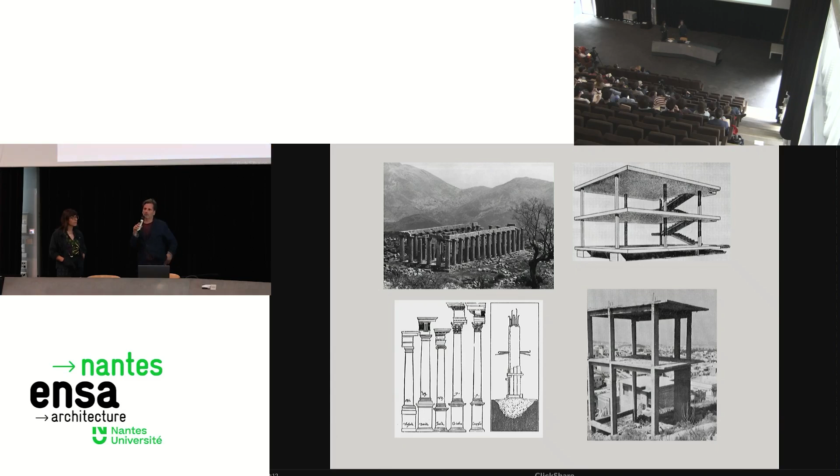In fact, in Greece it's very common to see things like this, objects that are semi-finished systems, like frames, which have been inhabited or programmed only partially, so part of them remain empty, unprogrammed, unfinished. This means Greek people have become very accustomed to certain ideas, for example the unfinished, the unorthodox, the random, the phasing of things. Architecture is not an object, not a specific form, not something that is necessarily finished or has a form.

On the other hand, we think, if we think of Athens, we think that it has peculiar beauty and form, which is largely thanks to other things, not the architecture of it. It's something that we often think this painting of Spiros Vassiliou summarizes very well, because we see here a portrait

of Athens that is made of its most important elements or layers. You see in the foreground an outdoor space with a couch, a veranda or roof terrace. Then you have a layer of six floors of frame, of pilotis, of polykatoikias, dominoes. But then you always have nature in the back, in the form of the mountain, and also a blue sky on top with an omnipresent sun that's always there. So Athens is made of all these things, not just the building typology of the domino, so it gets a particular form and beauty.

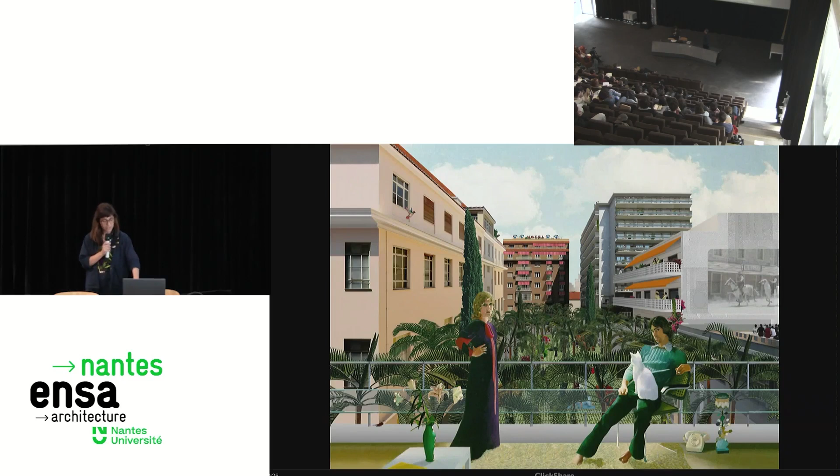Another project that also dealt with Athens as a whole is the theater square. This is an urban void in the center of Athens. What is interesting in this project is that it dealt with many different scales. I think it is one of the first projects that actually married our need to give an icon to the city, but also dealt with the human scale.

As you can see in this diagram, we use nature as architecture, as the icon, so you could see the palm trees from far away. But at the same time, we treated the ground floor with a lot of sensitivity to give a very sensual and intense spatial experience. This is the space as it is now, and this is our proposal. So we created this very dense space, but actually made out of nature alone.

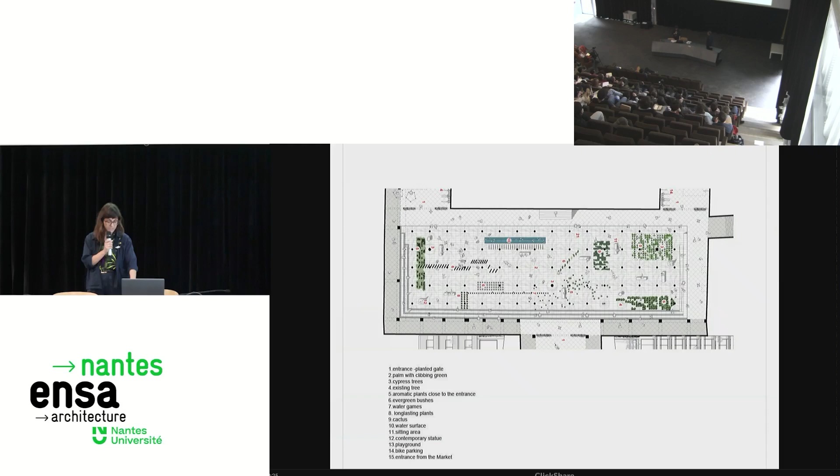The plan that you can see, we treated nature as a building, but again with a lot of detailing where the people were entering, where are the big palm trees that you can see from far away. The sketches that we were doing during the competition - we always start with a sketch and then we ended up with a collage that has more precision.

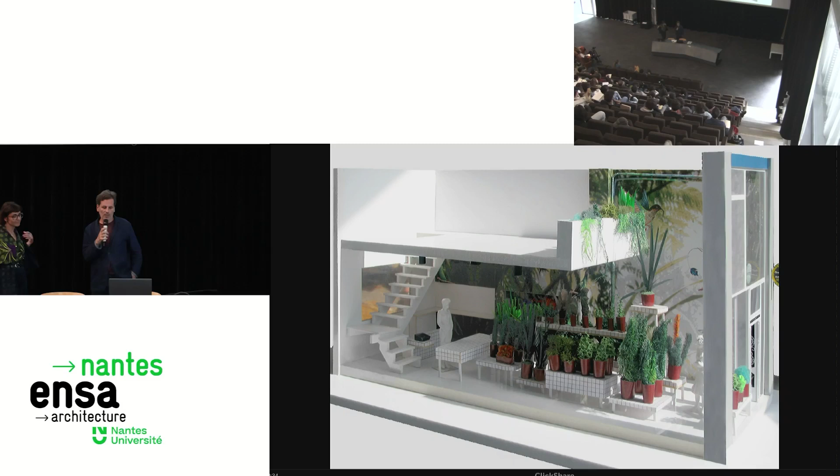What happened is that we treated this commission, this brief, as an urbanism brief. So what we did was create a small city inside the shop, in the center of the shop. We imagined little buildings that the clients, the owners of the flower shop, would be able to rearrange and create different cityscapes, like Manhattan.

It was interesting because it reflected the very ambitious radical projects of Superstudio, for example, the Supersurface. But it also became a mirror project to a lot of the urban projects Marianna was showing, which reflected on the relationship between artifice and nature, or city and nature. Because in this project, what we did was create a city that would hold nature, which is a bit what we were trying to do also in the Athens projects.

Specifically, the buildings we made, the tables, were basically white tables made of these square tiles. So the whole space became something like a ruler, a measuring device, an optic device, thanks to which you could appreciate and understand the beauty and differences between the different flowers and plants in the shop. And it really did work.

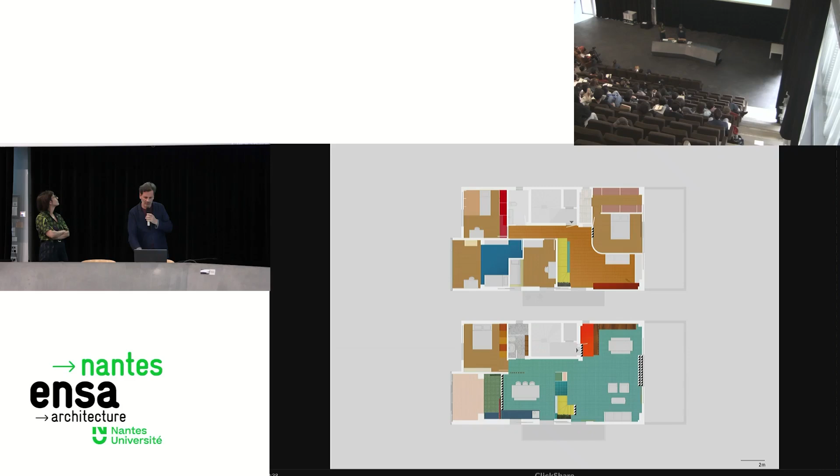What happened in this project is that, influenced by the Athens projects, it was imagined not as a house but as an environment. So the furniture, the first sketch we showed you, and all the programs and functions of the house were imagined as little islands, little universes, little areas, like an archipelago of functions through which the family could move.

So basically the social aspect of the house, as in the city—where the city is about living together—in the same way this house promotes being together. So instead of walls, it has different types of filters, divisions and partitions that are more nuanced, subtle, dynamic and flexible. There were a lot of mobile things so the family could live together and have a feeling of being together, and then when necessary, divide.

These are images from the lower level, which was designed as a kind of subterranean or water-sea situation, like Athens by Islands or Athens by Hills that you saw earlier. This is an image of the entrance, while the upper floor was the opposite—it was kind of an earth situation, more organic in colors and forms.

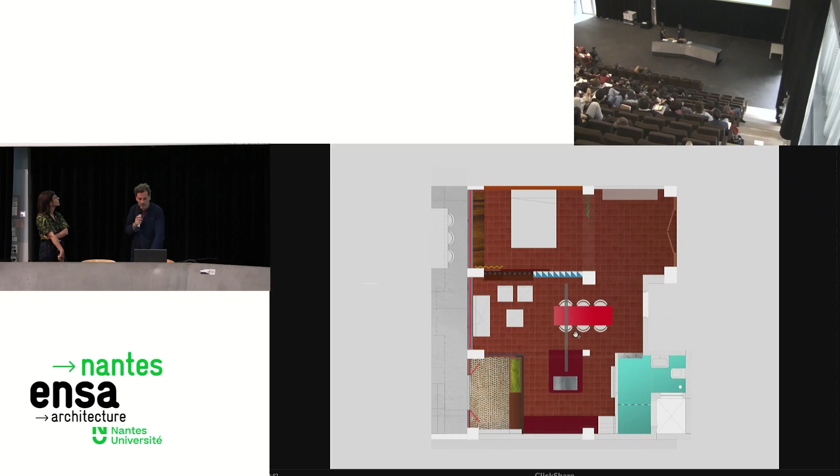And it closes with mobile things, invisible or visible. What was also interesting is that we brought a part of the outside in—we made a little garden-like space at the beginning, which makes you turn. As soon as you arrive, you turn, take off your shoes, leave your coat, jacket and bag, then enter and turn again to reach the kitchen. The result is that the space felt much bigger in experience, because it took more time to circulate.

This is the wall of the bathroom, which was shorter, again, for natural light.

And the second very radical project is this one, is the one that I told you is on top of a polykatoikia, the rooftop. It's called Ignatiou apartment, from last year, so it's more recent.

The difficulty with this one is the size: it was 22 square meters, so basically it's a room. This is the situation we saw when we visited it—4 columns and a roof, abandoned as well, like the basement, so it never materialized.

It's on top of a polykatoikia in the center of Athens, measuring roughly 5 by 4 meters. Three people bought it and wanted to make a house for it—a couple and their good friend, based in Paris. They bought it during COVID, during the quarantines, because they decided they really wanted a space in Athens, in case of more quarantines, where they could go to spend time.

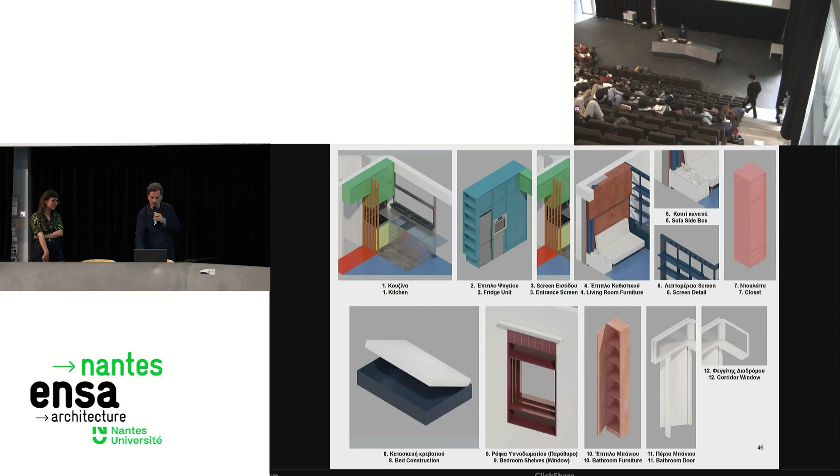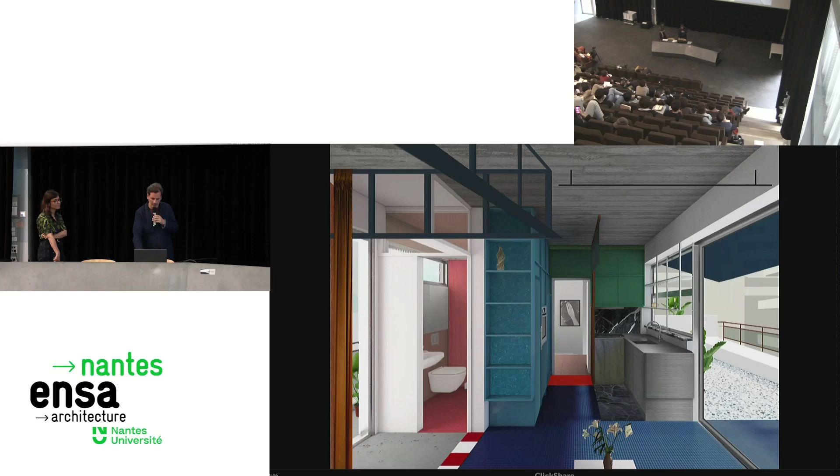Some images—this was the render from the veranda looking back, and the realization. This was a little bit like a piece of furniture, but in the scale of architecture. It's a similar situation to what we saw with the urban projects—the infiltration of urban thinking into architectural work, where there was absolutely no respect for scale in our work. Although it's a very small project, it was designed really precisely as something much bigger. Different views again, looking towards the entrance.

Another trick we did was to build a facade for the veranda. We added columns and a built-in bench all around with storage, a bit typical of the Greek islands, so that visually—especially since the glass has disappeared—you feel the interior stops at the columns. That's not true, but functionally it really does, because the climate is always good, so the door is always open.

So this was the second, maybe very radical project, I think. This is the entrance to this apartment, Ignatiou.

Maybe to finish with these small examples of projects, here's a sketch from a moment when we were trying to trace the different interiors and urban rooms we had designed in the city at the time, because all of them were slightly different pieces in the same family of exceptions of form and program, in a city that's otherwise universally very homogeneous, the same.

So this is the city, this is the city frame, the domino system, and then these are the different things we had designed—like the palm trees square that Marianna showed, 6 dogs, this is the city hall square with the water sprinklers, this was the square pool, a ferry boat we once suggested placing on top of the rooftops, and different apartments that we didn't show today.

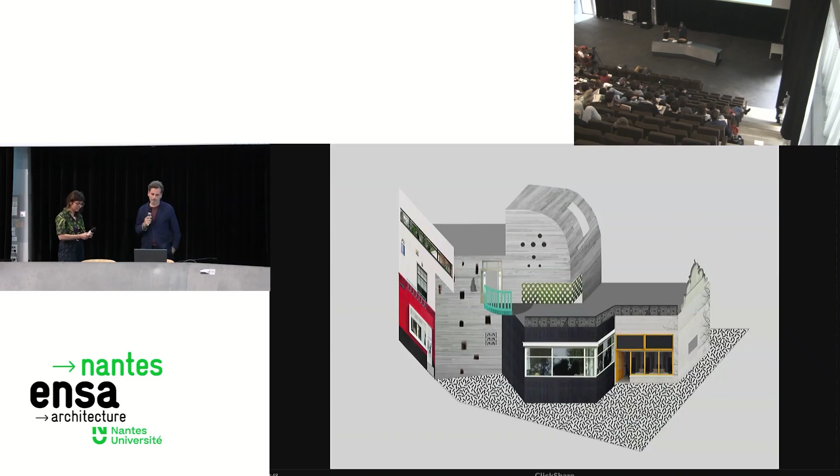I wanted to say that the previous building, this one, Ignatiu, first, because it was the COVID period, first we designed it, and then we visited. So when we entered and opened the door, we said, okay, this is it. I'm trying to show you how big it is, 4 by 5, to understand what this plan means. I don't know if you can tell, maybe it's something like this space, even less.

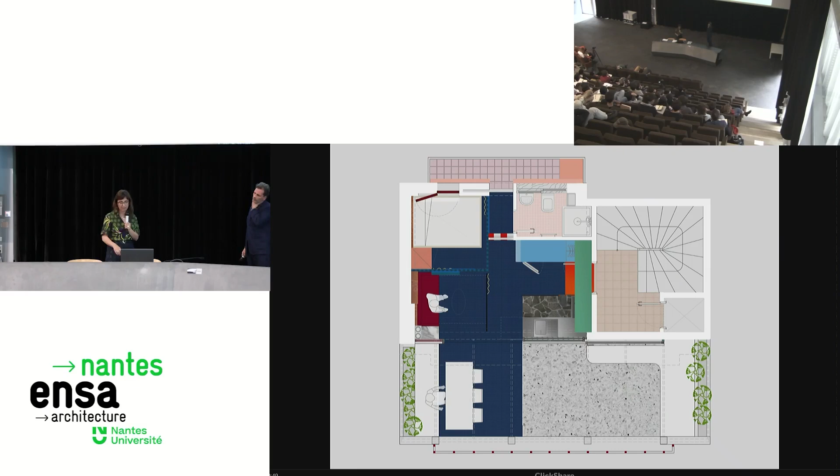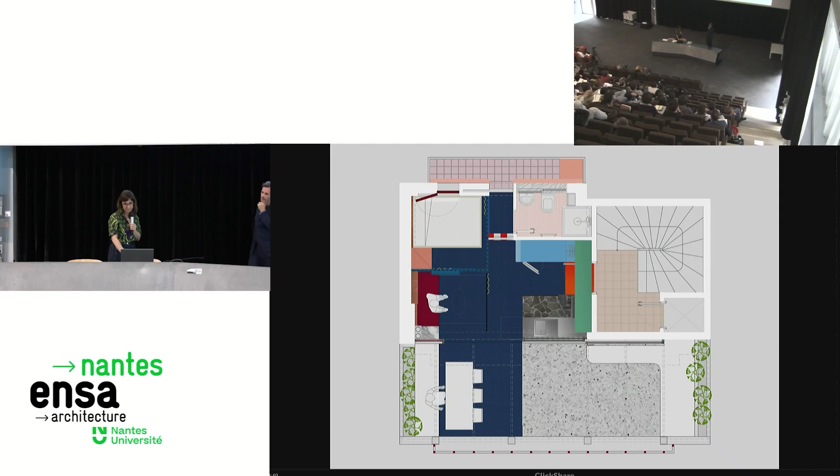It's very interesting, also in this apartment and the previous one, how important for us is the moment of the entrance. We always give a very generous, well-defined entrance, no matter how small the space is. And we always try to put windows and openings toward places where your eye can go as far as possible, giving this connection to the city but also making you feel you're in a bigger space than you are. Where we place the window is a very strategic, important moment in all of our projects.

This project was also nominated for Mies Awards this year. It's 22 square meters, but it was quite radical.

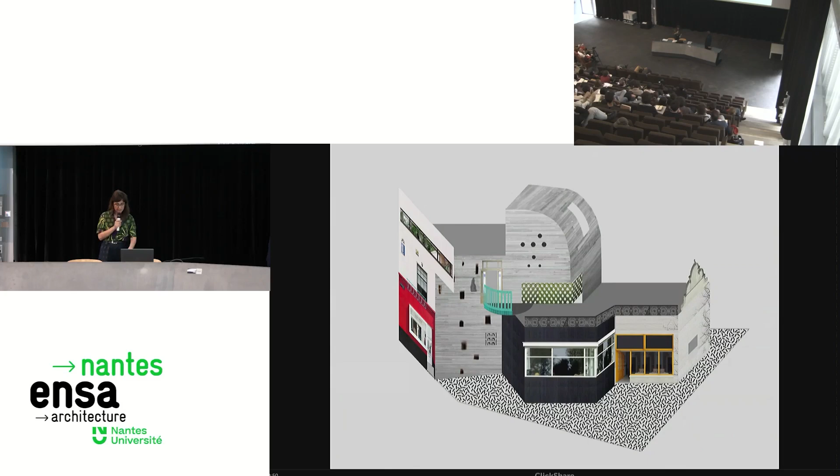And this is the first sketch that we did. Actually, we wanted to treat the house not as a house but as a neighborhood, a collection of different spatial experiences and different rooms, with a center courtyard and center garden, as we call it.

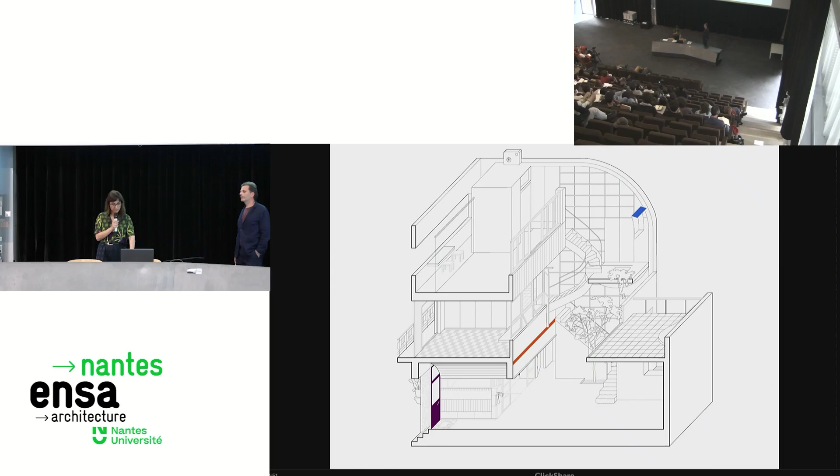And this is the plan of the ground floor. We decided to keep the outline of the existing house, which has this kind of very weird, pixelated shape.

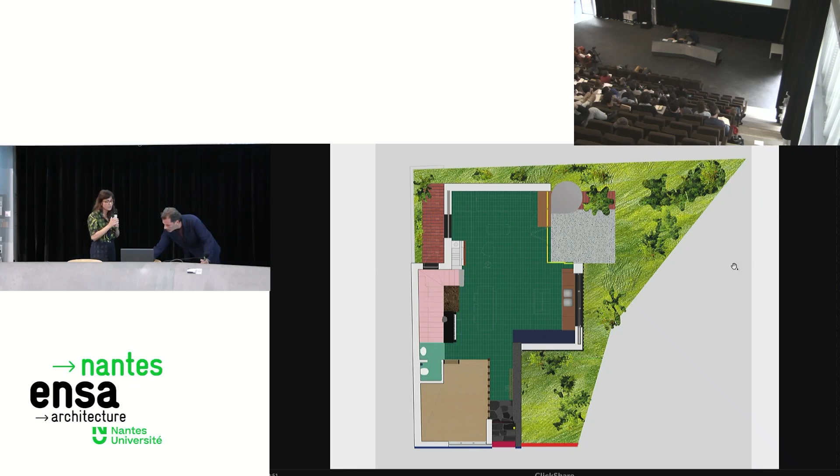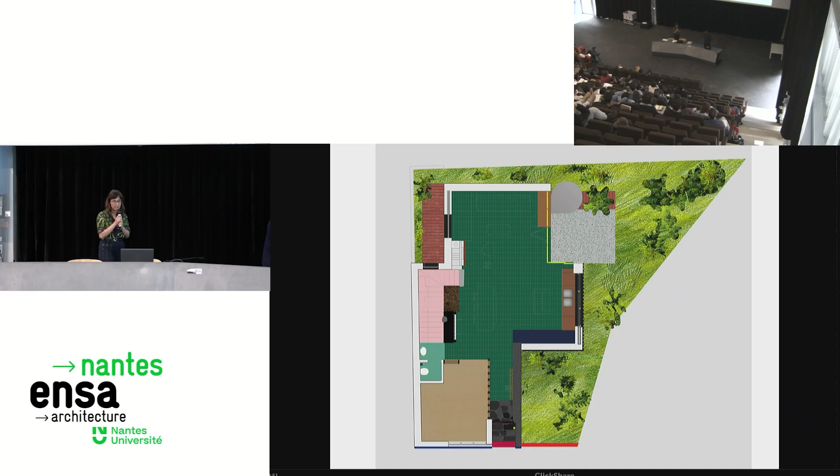For us, this plan was very interesting because it creates very narrow moments but also very open moments, and then you can go around the building. Actually, we designed the ground floor as part of the existing garden, so you cannot understand where the house stops and where the garden starts.

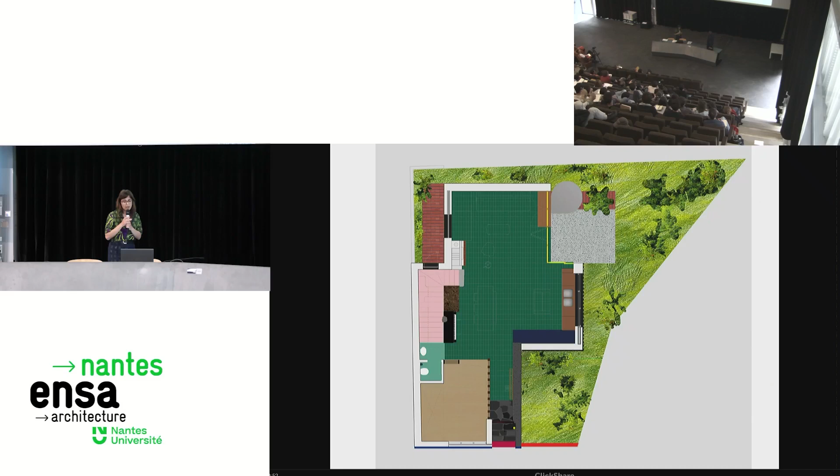As in all of our projects, we treat the materials of the floor with a lot of detail and sensitivity. We think it's the moment you're really in contact with the main material of the house. And this is a sketch of how our son, our kids, and the kids that come often are using the house.

We think this kind of use of the space mostly comes from the richness of materials that this house has. For example, the entrance, where the carpet is, is the wild nature that he tries to cut through. Then it's the stone, which is the earth. Then the green tile is the sea that he dives in. And then this is the wood, the tatami room, as we call it. For him it's the beach, and he takes off his shoes here.

And then we have some movable tables. For him, these are the boats that he goes around on, and so on.

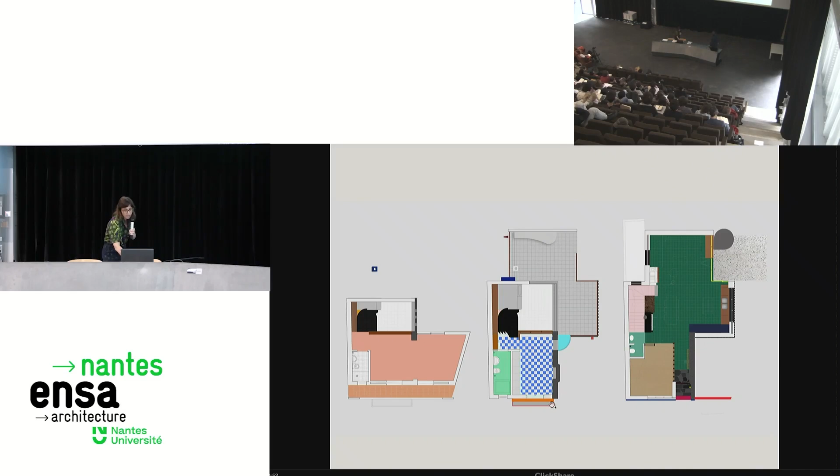These are all the floors of the house. The green one is the ground floor, then the first floor and the second floor. Each floor has its own atmosphere. The ground floor is mainly related to the garden, with these greenish colors. The first floor is very dense, mostly referring to Greek island architecture, with a lot of small scale. The upper floor is more connected to the sky and the sunset, more minimal, like a villa landed on top of the rest of the floors.

And these are the collages that we used as studies, not the final result. When we were doing the project, we were making this kind of collage. What's interesting here is that architecture, furniture, and ornamentation are all designed together from the beginning.

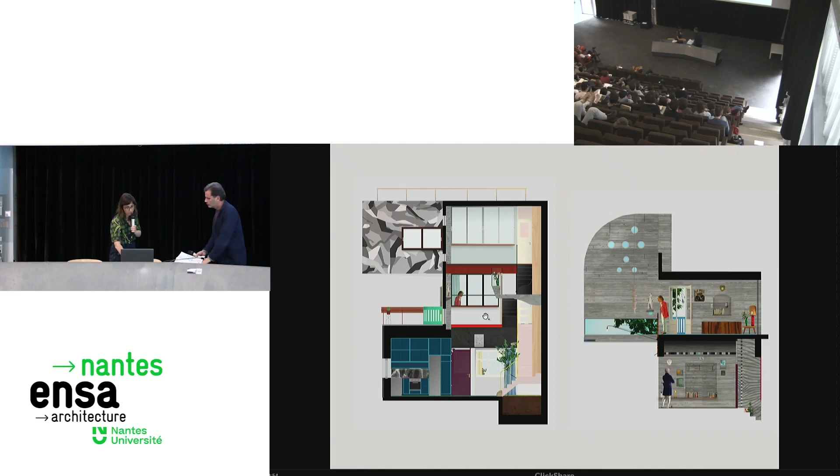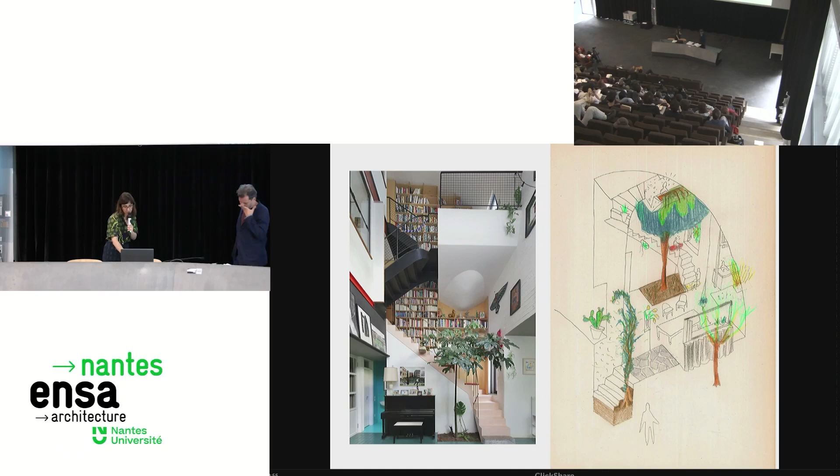And then you enter under this curved hall, which is again like a hug. And then you have this 11 meter void with a tree in the middle, and you can see the different rooms looking at this void. This is a sketch of how we use nature in the house, using it as an interior garden. The entrance towards the garden.

The typology of the house is mainly taken from the old Athenian houses that Aris Konstantinidis, a very important architect from the 50s, has studied. You can see it here, the relationship of the interior void with the old Athenian house typology, where the footprint of the house itself was very small, and all the life was happening outside. Again, this house, Petralona House, promotes the social life, as the other project that Konstantinos showed you.

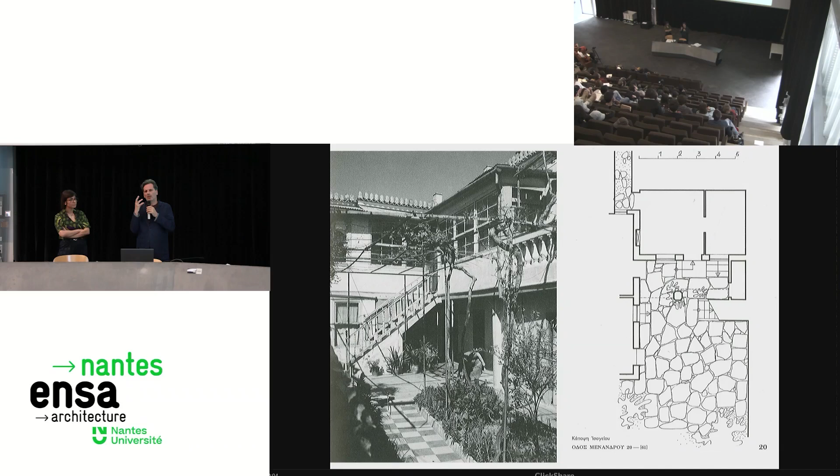So a few years ago, we were lucky to do a research project about it that we always wanted to do, at EPFL in Lausanne, where we were teaching at the time. We took this book, which is very unfinished, because Aris Konstantinidis, when he did it in the 50s, didn't have any funding. So what he did was just go and make a photograph in black and white, then draw one plan or maybe two plans and maybe a section. So it's a very partial representation of these houses, documentation of these houses.

It's really missing information. If you notice the pictures, they're full of these things that we treasure so much in Greek culture and architecture, such as spontaneity, improvisation, freedom, richness, and poetry. You see all these things happening by non-architects, and at the same time, being totally economical - it's so simple, like this house has only two rooms. Also very unorthodox and strange typologies - you see the plans with this deep garden, for example.

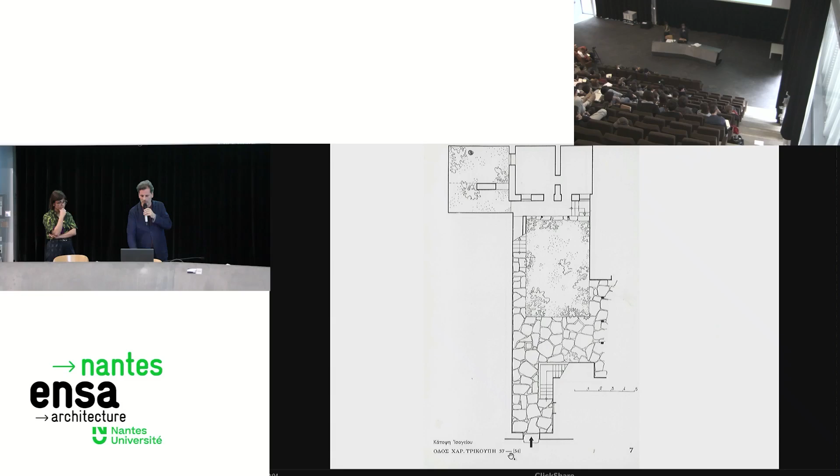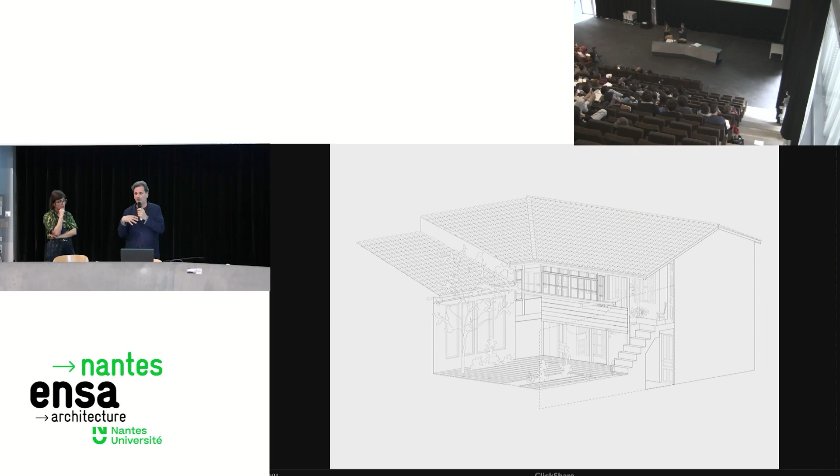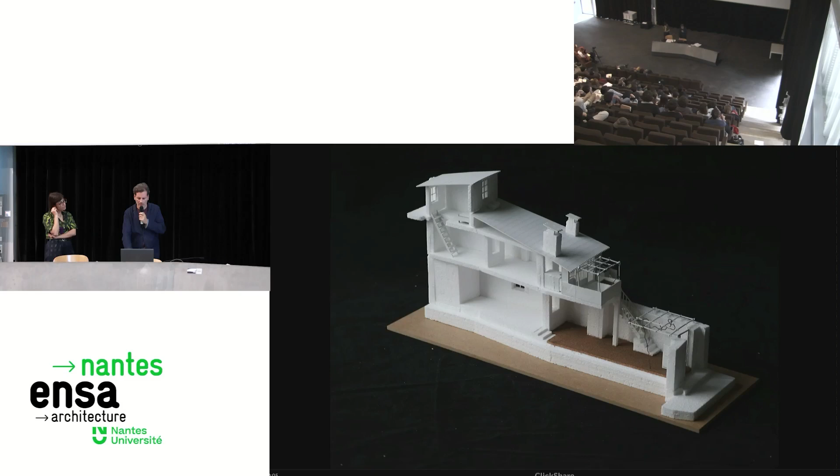So what we did, together with the students, was carefully study the existing drawings and maybe one or two pictures, and then try to recreate the whole house. We made axonometric 3D models, whole axonometric drawings, but also models of these houses in great detail, trying to showcase everything that was particular or strange about them, including construction details and really interesting typologies. It's something we've also been doing in our own holidays, cataloging the houses of the islands we randomly stay at. So this was about discovering and celebrating social life, efficiency, and economy in Greek living.

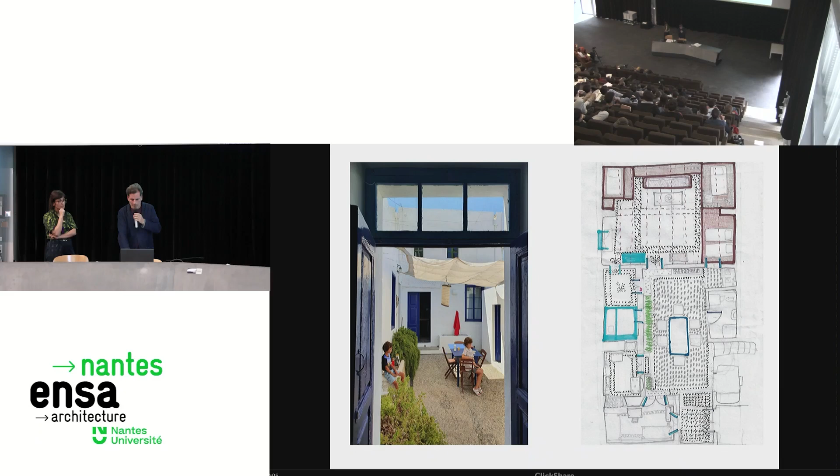So I'll show you very fast two more recent residential projects that came after or at the same time as this research about the old Athenian houses, which had to do with how to introduce social life or enhance social life, common life, public space into existing houses.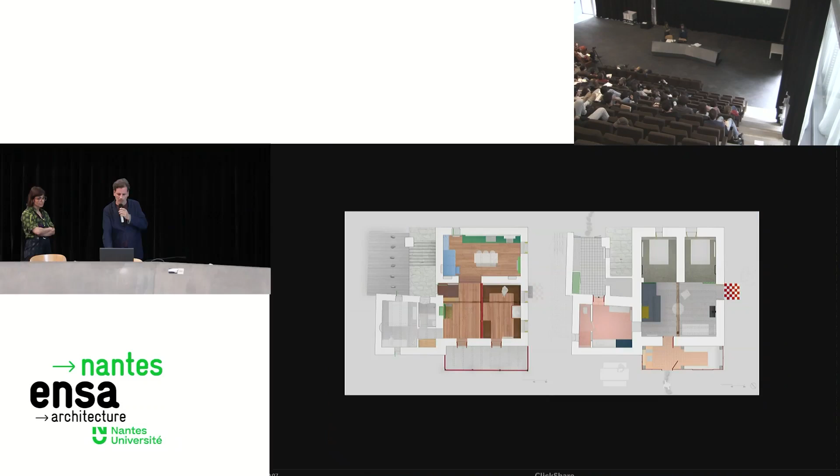And the second project, where we did something similar in an opposite way, was actually not a polykatοικία in this case. It was a house in the Peloponnese that we were asked to renovate for a family with 2 children. And what we did there was...

divide their living room in half, making their living room smaller, which was something very unconventional and really strange for them to hear at first. They couldn't understand it, but they were very smart, and we convinced them to do it, and it really worked because it created this old school type of space, which is much more intimate.

This is a winter destination. It's a cold place, so it's more about living closely. So we put this divider, and there were other things happening, also inspired by traditional Greek culture and daily life, like putting a bed in the kitchen, so when the grandmother was cooking, the kids or grandchildren were sleeping and she could keep an eye on them.

So it's very particular types of Greek space that we managed to introduce, while also turning the stable, the basement, into the kids' floor. This is where the horses would normally sleep. It was not supposed to be part of the house, but it became.

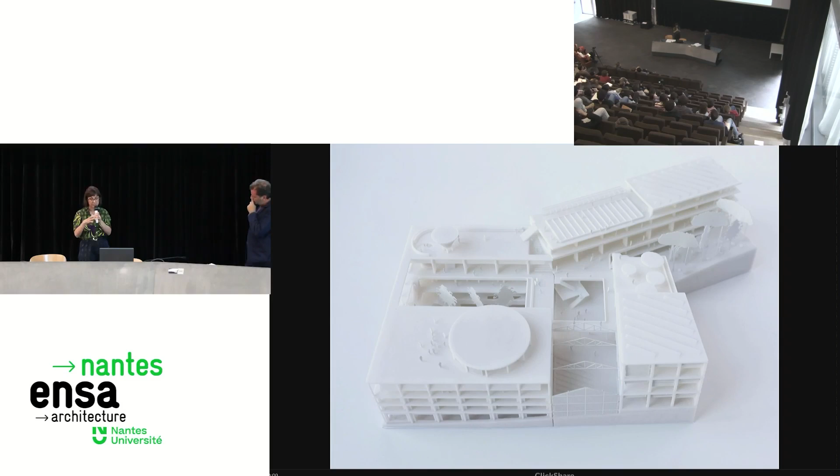The facade of the school is very open. It's a continuous facade, but actually here there is a void towards the center, the central open space. What is interesting is that we divide the program, dividing the buildings per program and not per institution. So here is administration, forum, and exhibition space. These are the Ateliers, all connected through these polykatοικία-like step-back terraces.

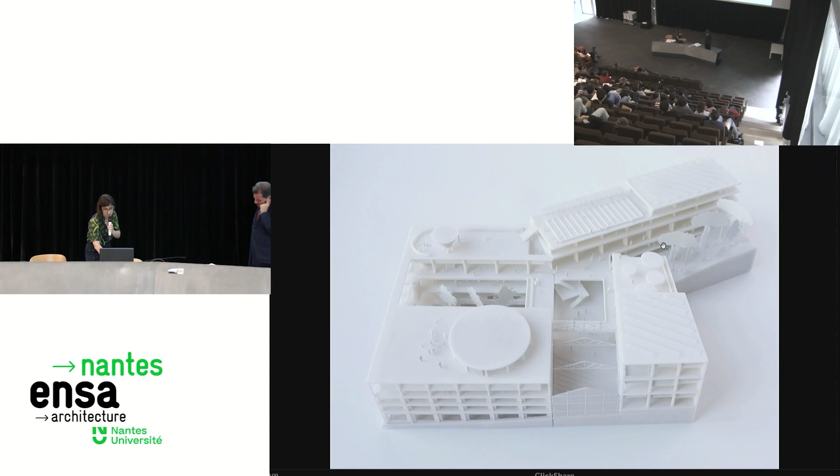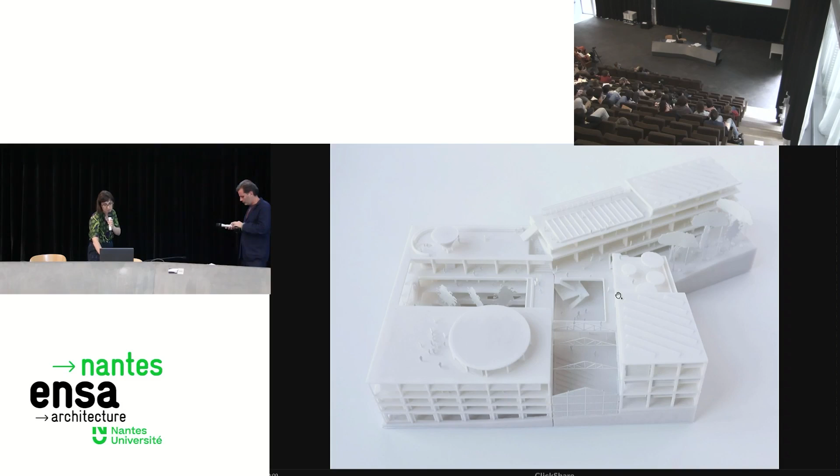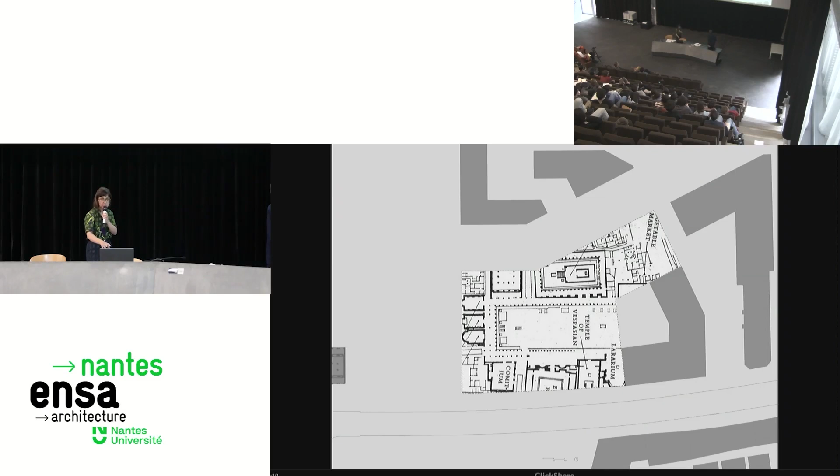We did a lot of collages, mainly referring to the ancient agora, this one, or the forum in Pompeii, and actually that was the starting point of the project: how the buildings are connected through the open space.

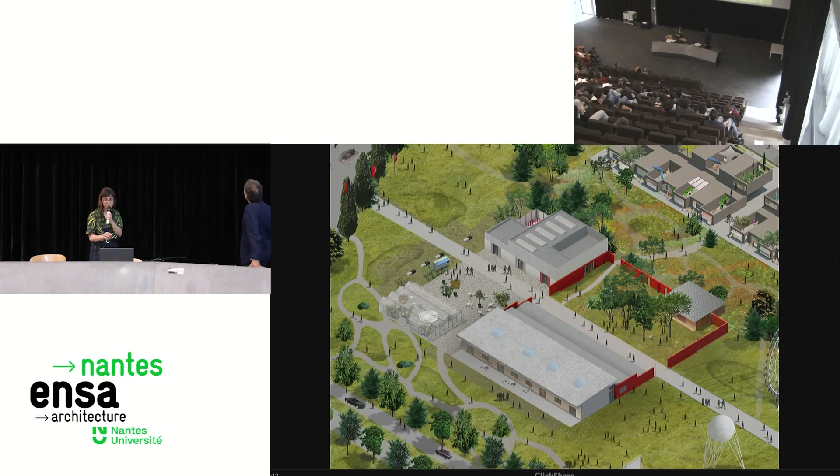This is a project that we did with 51N4E from Belgium, that was also inaugurated last November. Again, all the attention was given to the social life, and first we designed the open spaces and then the buildings themselves. So this is a space for exhibition, atelier, and workshop, and it's in Genk city, a very industrial city.

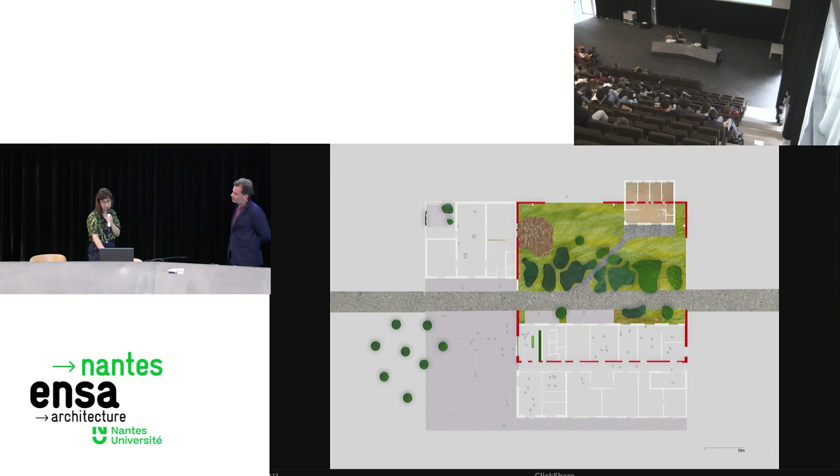This is the collage that we did for the competition. So there is this wall, the red wall, that defines the main space, which is a garden, while in front there is a more urban, more public square, and this building has its own architectural identity. And you can see here behind the connection with the context.

All these projects were presented in May last year in A+U, an issue dedicated to our work.

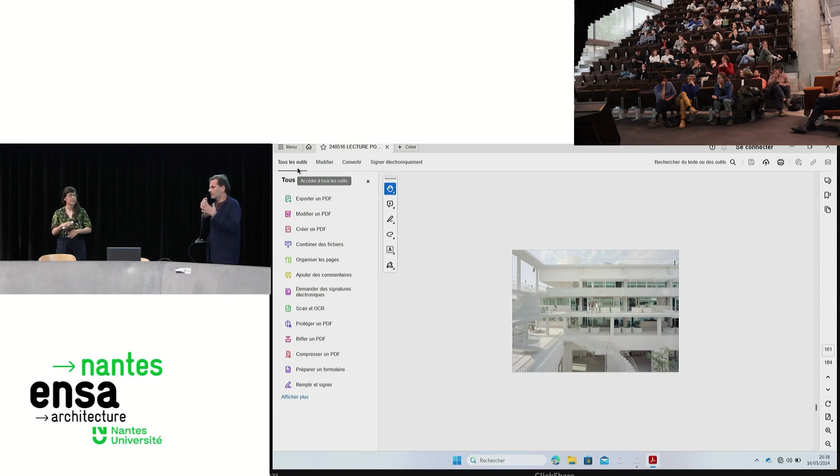So you're asking us to elaborate a little bit more about how we see Athens as a Dom-ino city. Yeah, you talk about layers. Yes, sorry.

For me, there's a lot of things to say about that, but the most important aspect is the fact that, to me, the Maison Dom-ino is a system, right? It's a frame, and then there's no form, there's no result, it's not finished. The inhabitant will go and fill the space on their own. So Athens is a little bit like that, and the result is this first picture we showed, which is a kind of formless lack of architecture in a way. It's just an infrastructure. So it's also what we tried to show in this sketch we had, where it was just a surface of little lines and then these interiors. Because most of our work was interventions inside already existing Dom-ino systems, Maisons Dom-ino, polykatoikias.

We saw our work, our space, as little exceptions of color or density, or identity—maybe that's more important—set into this totally universal layer of columns and plates, concrete.

In a sea of no form, we saw our projects as little exceptions of form, and I think that's really something you feel if you visit one of our apartments or projects. You open a door, you arrive from the city, you walk on the Greek pavements, take an elevator in a Dom-ino building, open the door, you're in a corridor—it's always this same formless experience. Then you open a door and you're surrounded by something, an identity, a spatial identity. That's what was more critical about the relation of the Dom-ino system and the architecture we made. It was very important to have these identities.